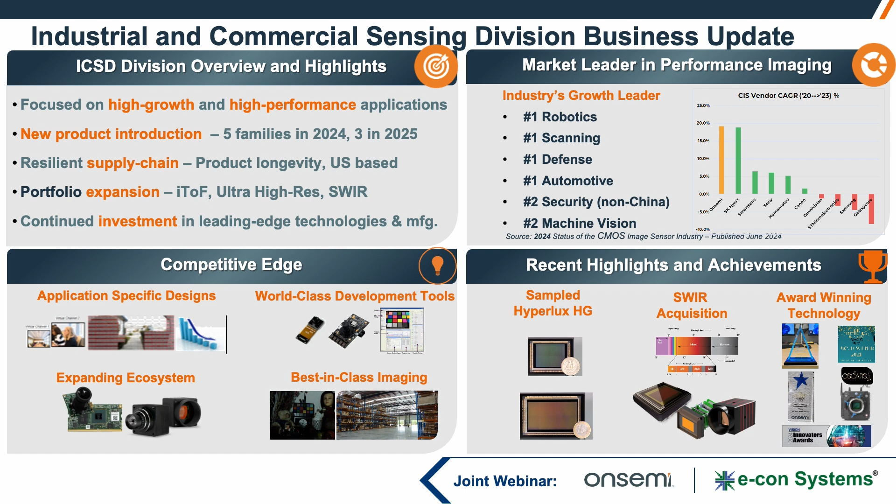So our competitive edge lies in our application specific designs. We have an expanding ecosystem of modules and partners that we are working with, such as e-con. And we have world-class development tools to develop best-in-class imaging solutions. Those tools include, again, our modules and also our DevWare software platform, which is an industry standard now.

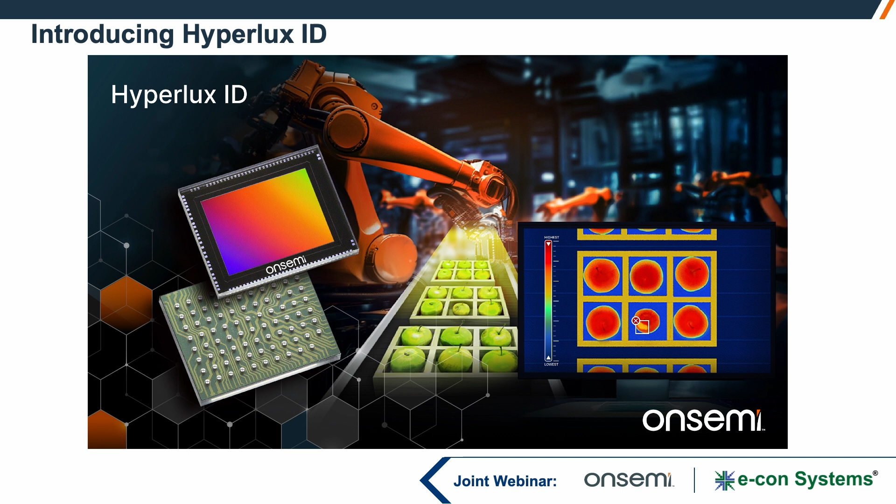And today we'd like to introduce Hyperlux ID, our first iToF sensor directly designed for industrial depth sensing. It's a 1.2 megapixel resolution, 3.5 micron BSI sensor, and it's a global shutter type sensor. It has really high quantum efficiency in the near infrared, up to 43% at 940. And it has on-chip depth calculations that enable up to 60 frames per second in full resolution and 100 frames per second in VGA. It's ideal for many different types of applications, including machine vision, factory automation, robotics, AGVs, drones, and other consumer type applications like gesture recognition, humanoid robots.

And we've designed this sensor to overcome the main challenges we see for industrial depth sensing, which include low motion artifacts, so we have a unique integration and readout structure along with that global shutter sensor and on-chip storage; high depth resolution accuracy enabled by our 1.2 megapixel global shutter and BSI pixels; and low cost and small size that's enabled by our on-chip depth processing, so no extra frame memory or FPGA is required.

It reduces the external compute that's required as well. We can also enable long distance with high ambient light rejection. This is enabled by our smart iToF implementation, and it allows us to range up to 20 meters further than standard iToF and still maintain outdoor operation.

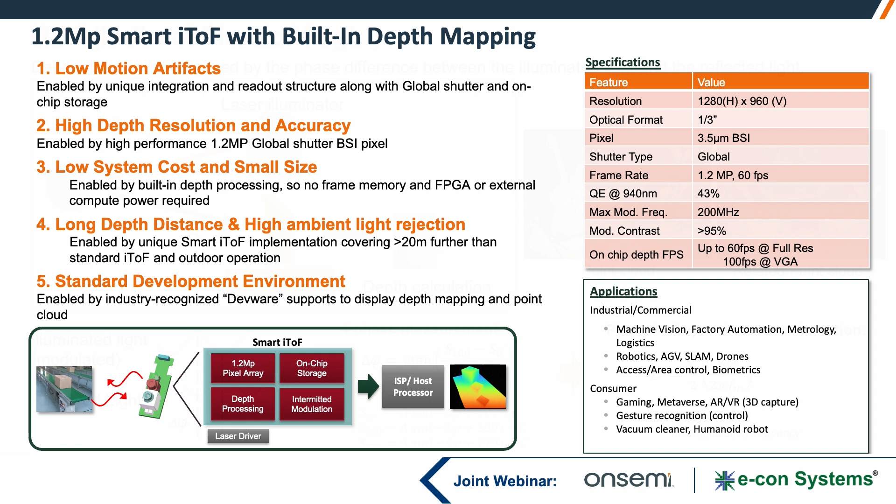So some of you may ask, how does indirect time of flight work? So the depth distance is calculated based on the phase difference between our outgoing illumination signal, which is a modulated light signal, and the reflected light signal detected by our sensor. And to calculate this phase, we need up to 4 different phase measurements or 4 raw frames.

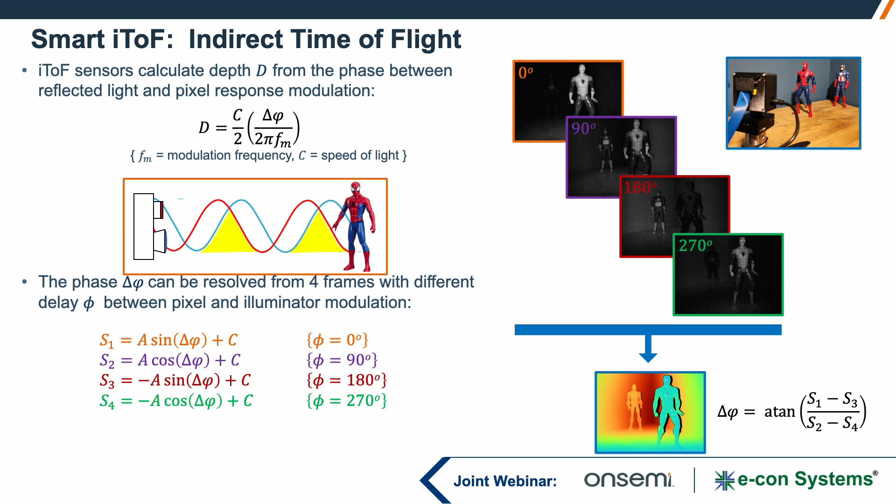And we can see this illustrated on this slide here, where we have resolving the phase difference from 4 different raw frames with different phase delay between the received pixel and the illuminated modulation. And based on this, we can get the phase difference, and that gives us the distance to the object, and the depth range achievable is a function of the modulation frequency.

So again, looking at the main challenges, one of the key things is dealing with motion artifacts. And if we look at standard iToF, like the image on the top left, when we throw a ball in the air, we can see that there are some missing pixels above and below that ball. And that's caused by motion blur. And that's mainly due to the readout scheme used by traditional iToF, where there's an exposure followed by a readout sequentially across the entire frame.

Now, our implementation, we've engineered to reduce that motion blur by doing all the exposures together, storing that data on our on-chip memory, and then we do a sequential readout all within one depth frame. And that enables applications such as fast-moving conveyors, collision avoidance on AGVs and AMRs, and gesture recognition.

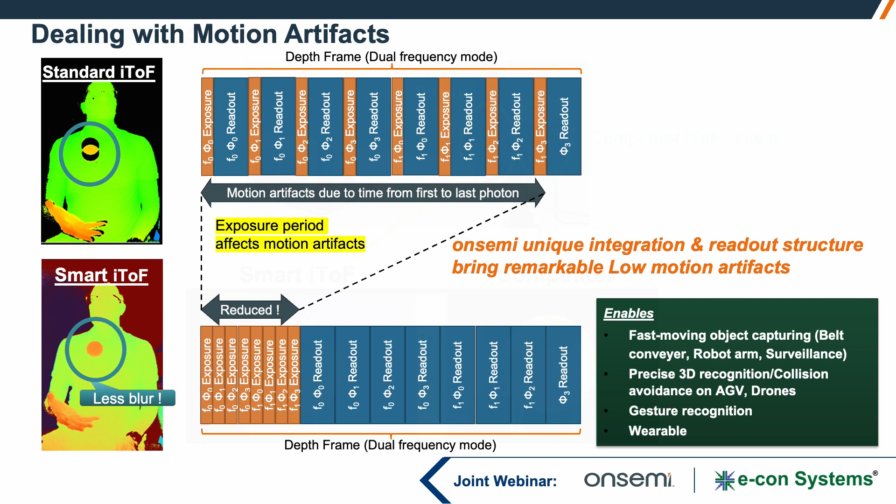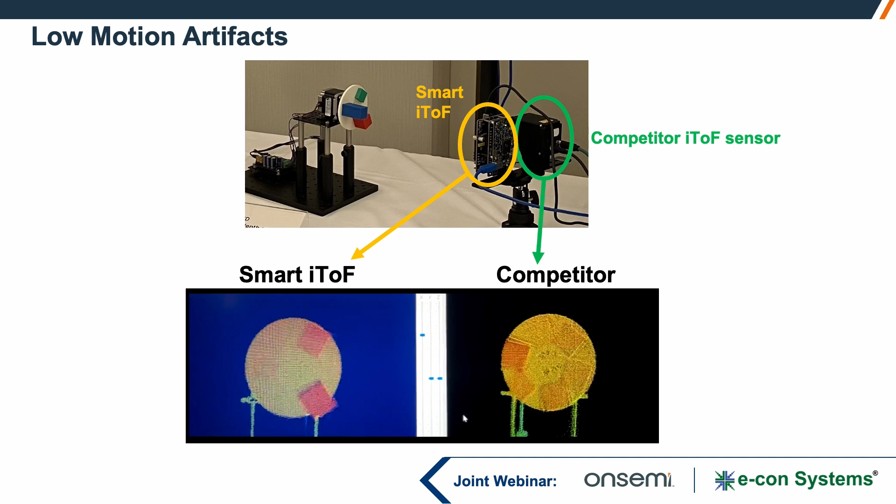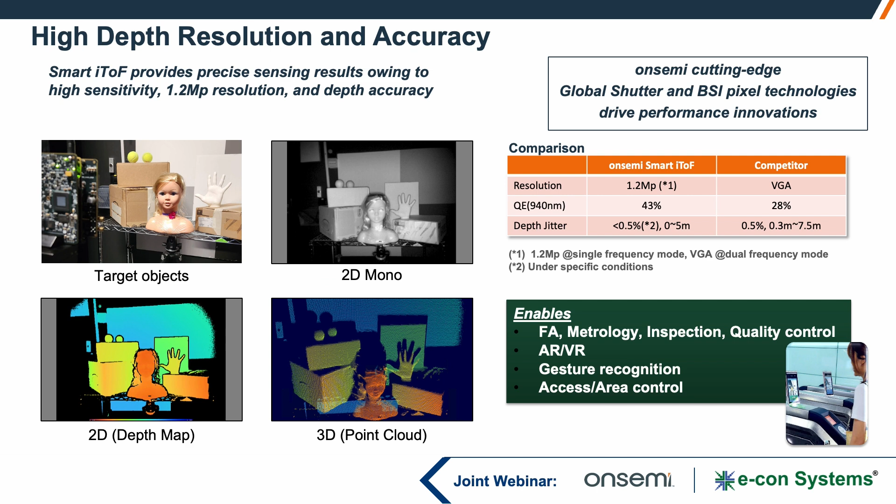So we can see the target objects, an image of them here. We can see the 2D mono image that you can get from the sensor. And we can also see the depth map and the point cloud. And we can see that we get, because of that 1.2 megapixel resolution, really fine, highly detailed points in our point cloud. And we can pick out clear facial features and object outlines from that point cloud as well. So that enables key applications such as inspection, quality control, access and area control.